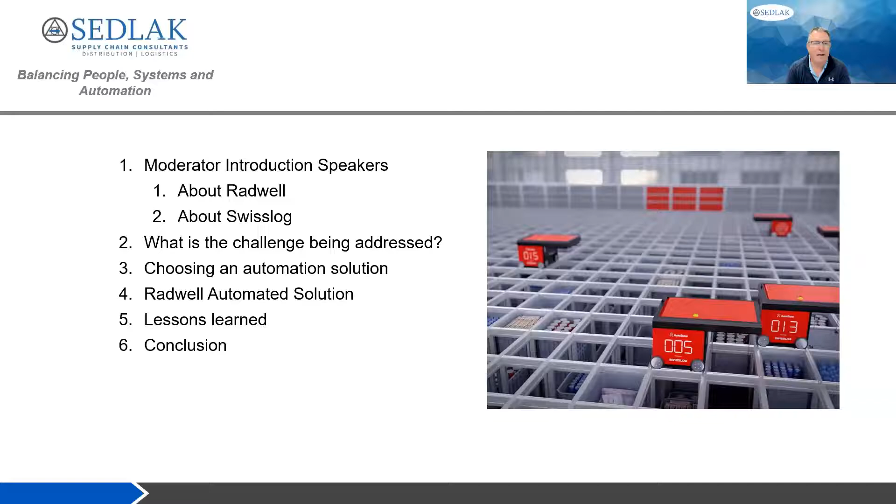Thanks, Lou. Appreciate that. So joining us today, we have two industry veterans that will share a little bit about themselves and a great case history. I know everybody's interested, as Lou mentioned, in goods to person in particular, so you won't be disappointed. So getting right to it, I want to introduce for our session first, from Swisslog, we have Paul Gottschlich, who's a sales director and a 40-year veteran of the industry. He's been instrumental in shaping supply chain automation strategies for trusted global players, and played a key role in the first ever AutoStore installation in North America. Joining Paul from Radwell will be Brian Janis, who's the global director of procurement at Radwell. He's responsible for purchasing, inventory, relationships, data, and catalog management for Radwell globally. Prior to his role, he handled facility design, project management, and automation systems implementation. Brian holds a bachelor's degree from Virginia Tech in mechanical engineering.

Paul, you want to kick things off for us? Will do. The first thing we'll do is have Radwell go through and explain who they are, and then we'll follow up with Swisslog explaining who Swisslog is. So I'll turn it over to Radwell. Brian, if you could go through and describe Radwell.

Thanks, Paul. Yeah, I'm Brian Janis, I'm the Global Procurement Director here at Radwell. Just to start off, who is Radwell? So Radwell, we are an automation, electronics, pneumatics, control, HVAC company focused around really MRO solutions for manufacturing facilities. If you think about how it's made and all the components and things that go into manufacturing, the parts, the pieces of automation, and really material handling systems, other systems, assembly lines, etc., we have the ability to fix those, repair those, or we have surplus components, or we're an authorized broker for new product.

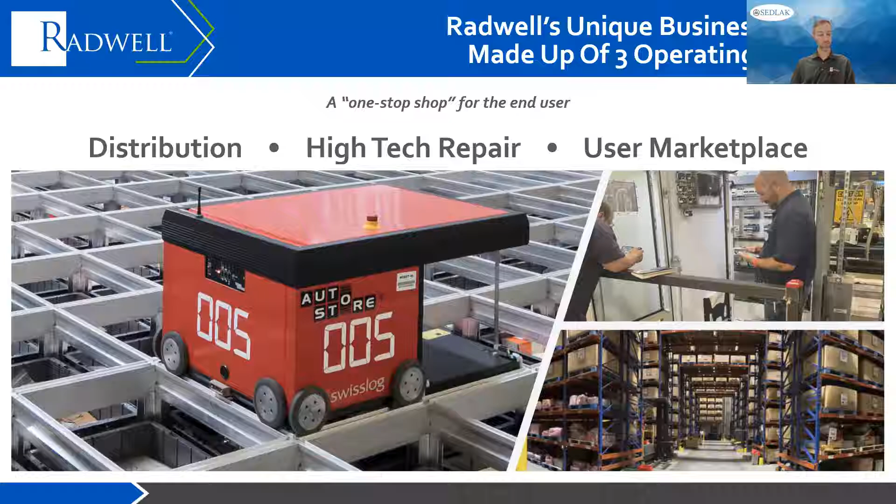Radwell services a whole bunch of different industries. As I described earlier, anything you can think of in terms of manufacturing, we're very much in those industries and in that area.

We have a very high emphasis on our customers, and what we do as a business is always customer driven. Because of that, we really want to focus on automation, and we wanted to use some of the automation that we fix and help our customers fix within our own facility. So because of all of that, we worked with Swisslog and explored some options, and we'd like to go through some of that and share our experiences.

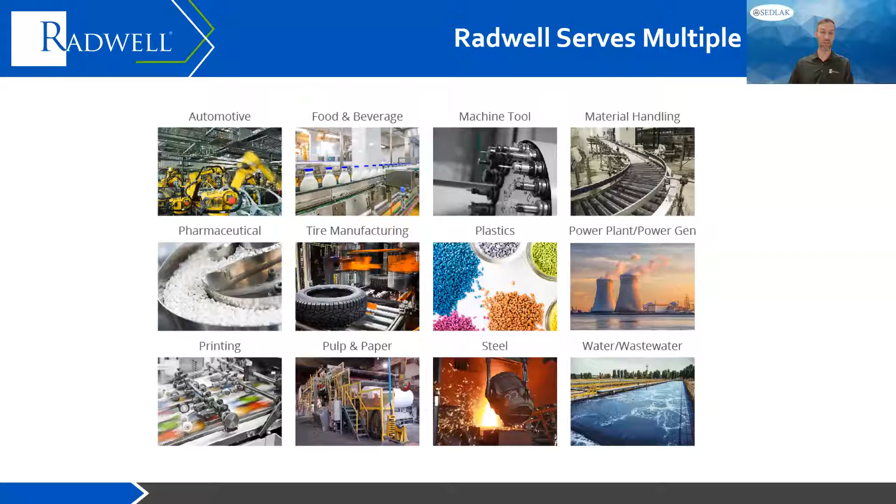And I'll turn it over to you, Paul.

Thanks, Brian. So as I said earlier, we'll get into a few slides that describe who Swisslog is, since I don't think everybody on the call knows who Swisslog is. I think everyone will agree we're living in a fast moving, continually changing and dynamic world, and that is why it's important to understand the main drivers in our businesses.

For the material handling industry, it has been trending up over many, many years. But over the past several years, more companies than ever before have found the need to automate, and in some cases, to survive. Therefore, at Swisslog, we believe the future in supply chain is robotics of varying types and needs to be data-driven.

As you look at Swisslog, we're located in 25 different countries. This allows us to support customers almost anywhere in the world. Our employees are located regionally, not centrally, to support our customers. This includes personnel in sales, implementation, control, software, and all areas associated with post-go-live support.

We have 10 different technologies that we use in our systems, along with third-party technologies. This allows us to develop the optimal solution for our customers. We have 6 product centers continuously improving our products and developing new products as required to meet market trends.

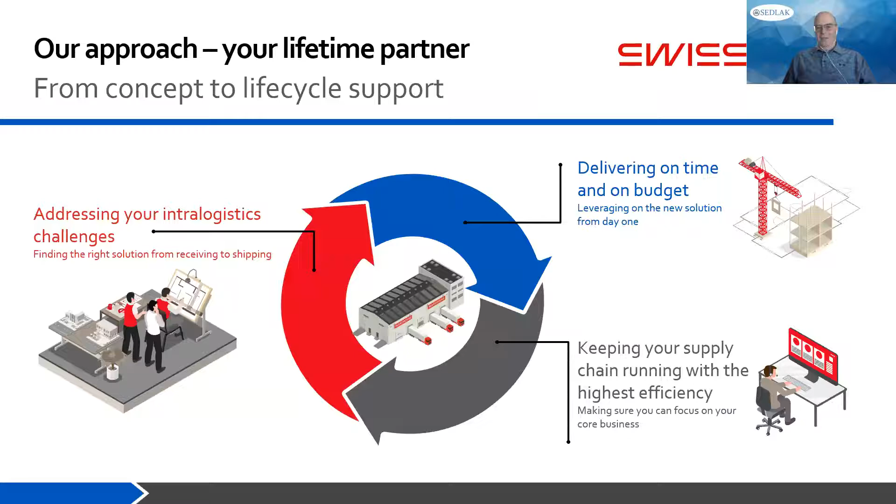To name a few features of our post-go-live support, we offer a global service organization that tailors maintenance and support programs for each customer to augment services they're not able to provide themselves. This can range from routine maintenance all the way up to full-time on-site support if required. We have 24/7 support via our help desk to ensure system throughput and uptime are maximized. We offer modernizations and expansions for any changes caused by changing business requirements, and we also have service technicians, local spare parts depots, IT managed services, plus other capabilities for post-go-live support.

For light goods technologies, which means handling either cases or totes, that would be the Cyclone Carrier, Tornado cranes, CarryPick, AutoStore, and QuickMove conveyors. Other robotic technologies we provide are ItemPiQ, to pick individual units from various entities, and ACPaQ, which is for mixed case palletizing.

To manage all these technologies and orchestrate the flow through our systems, we have a software package called SynQ, which contains extensive functionality and features that not only manage the different technologies, but can also manage operations for part of or the entire distribution center or warehouse.

SynQ provides synchronized intelligence that connects automation, robotics, people, and processes for all of our solutions. You can kind of figure it to be the conductor of an orchestra.

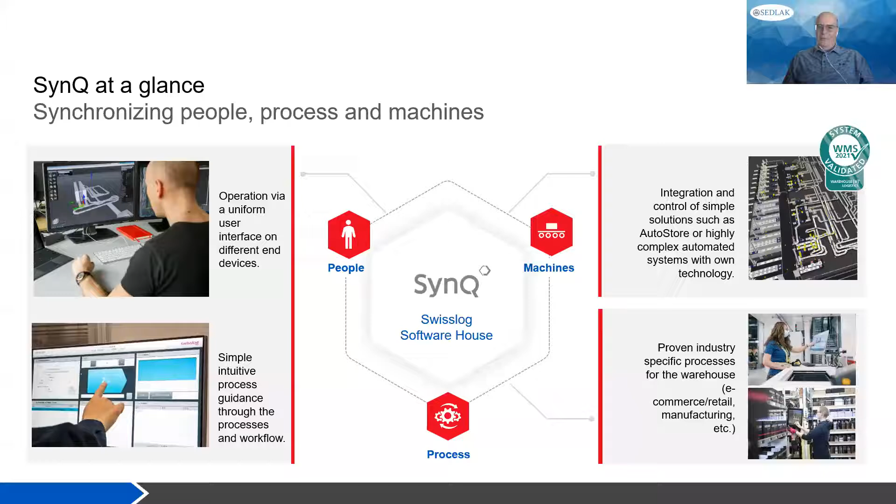SynQ is a modular platform with a single user interface that provides warehouse management, warehouse control, and material handling solutions for simple to highly complex automated systems. The platform is continuously developed by our SynQ Competency Center, with releases twice per year.

We have multiple technologies that compete in the same supply chain space, and we use the technology that is best for the particular application. The first technology deemed viable for Radwell was AutoStore.

AutoStore requires a special tote, called a bin, that is designed specifically for the technology. AutoStore stores and retrieves the bins stacked on top of each other with minimal space between the stacks, providing very high density of the bins.

AutoStore is best used when there is moderate to high inventory, and can be designed for low to high performance requirements.

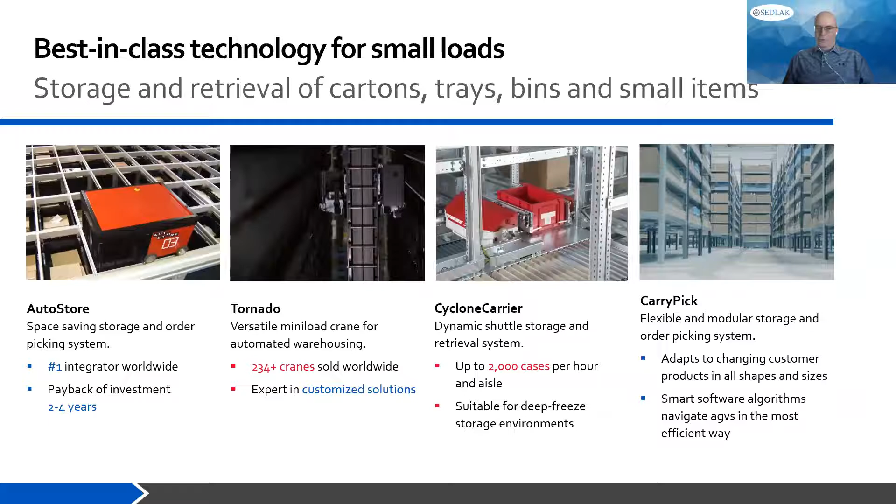The CycloneCarrier, which is a shuttle-based technology, was also viable, but is more ideal for low inventory and high performance. CarryPick was not available, even though it's shown here, at the time Radwell was considering the different technologies.

CarryPick is also a viable solution and is best used when products are larger, or the quantity of SKUs is low but with high performance, or clear space is limited in the building. It can also be used for a large quantity of SKUs or high performance.

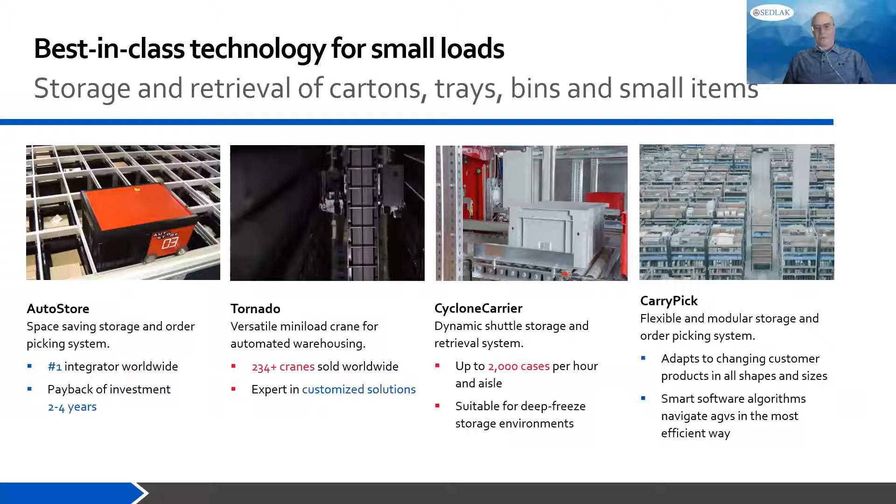Since we have multiple technologies to use, we work with the customer so they fully understand the pros and cons of each technology, so the best technology is selected for their solution, as was done for Radwell.

Now just to jump into the Radwell side and try to understand how we choose between all these options: our primary focus is a solution driven to better our customers' experience with Radwell. The nature of the surplus business is that we end up with a lot of inventory, a lot of items, a lot of things that don't move very fast but take up a lot of space.

The competitiveness of distribution requires us to be as timely as possible, while also ensuring that we have things on the shelf and can pick, pull, and ship those items quickly.

With the complexity of repair, we basically have another customer inside of our building that can be as demanding as manufacturing, or sometimes more demanding, in terms of having our warehouse deliver products to them. In a manufacturing environment, downtime is critical for a maintenance manager, who wants to avoid that as much as possible.

And when those downtimes do occur, our service needs to be spot on from Radwell's perspective.

We need to be quick, fast, and efficient with getting that inventory out to them, because they're in an emergency situation where something's stuck, something's not moving, they're not producing. Management is keen on ensuring that downtime is reduced at any cost. That's kind of our motivation behind our desire to do better for our customers, along with some common warehousing desires, which we have listed here.

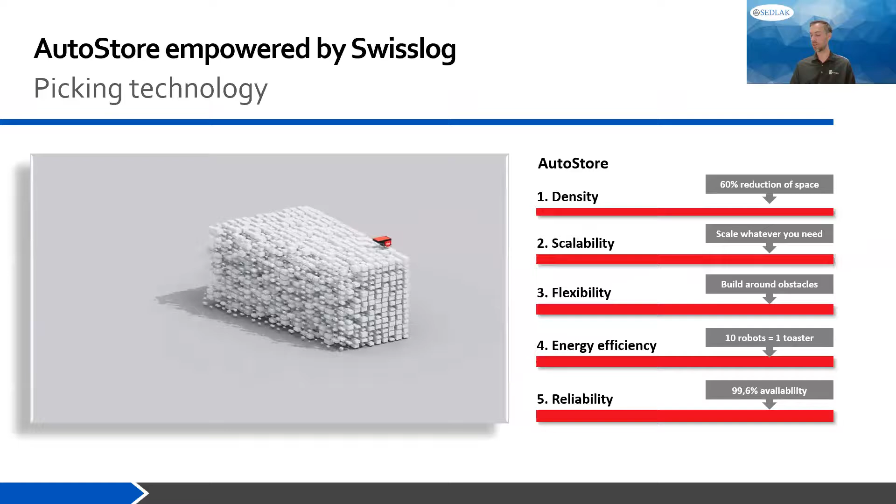And through this, we looked at obviously all the Tornado mini load, the Cyclone carrier, and others to try to understand it, and eventually ended up with the AutoStore.

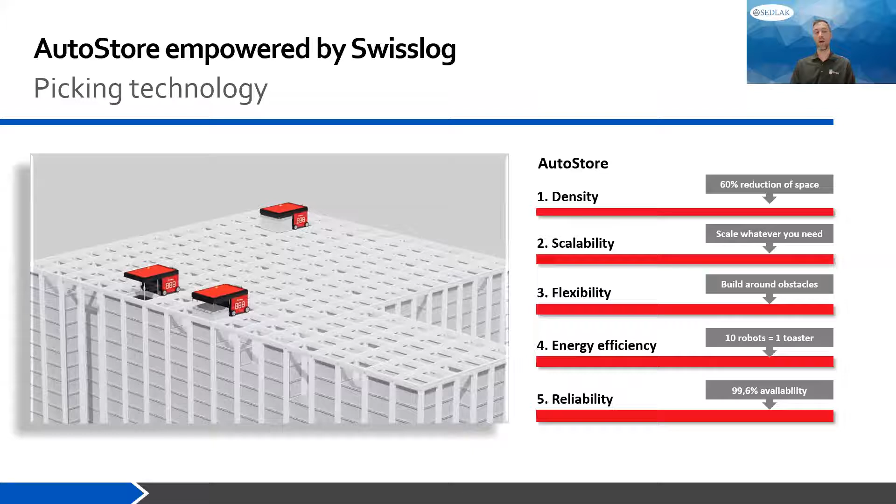And the reasons why were the density of this system. We were able to get the density that we wanted, and be able to store items in a space that most systems wouldn't have been able to store as much as we got.

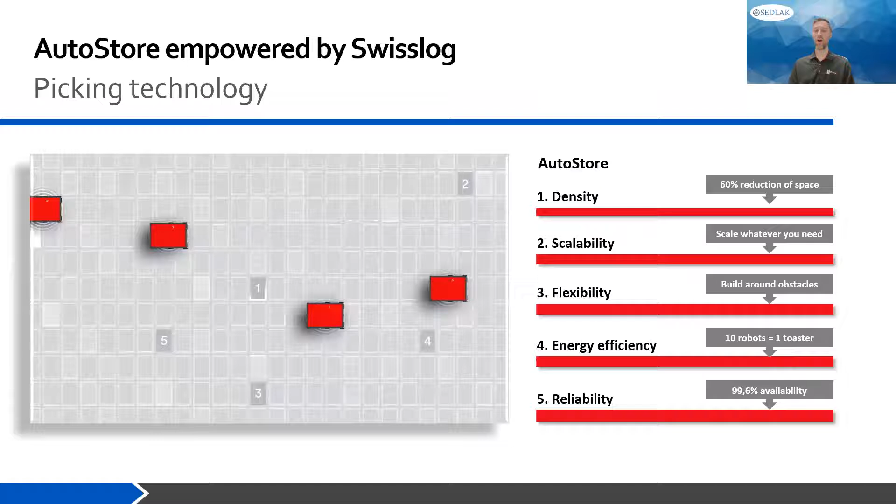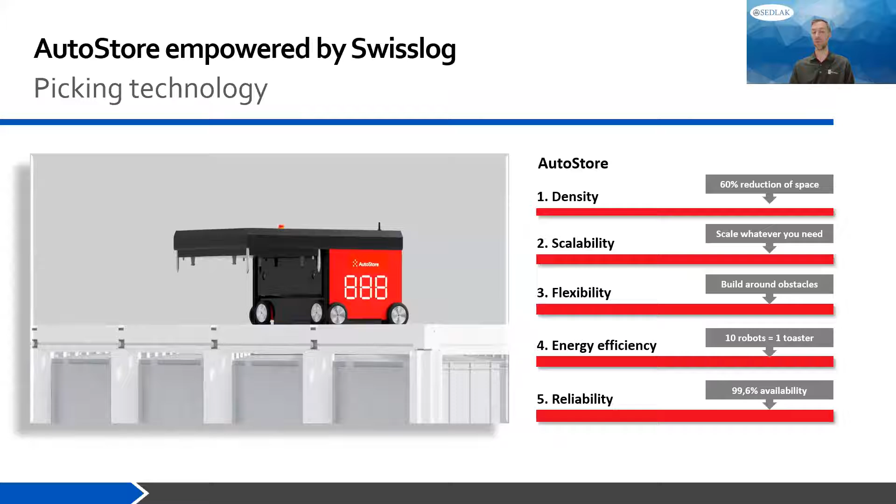With scalability, that's a huge one as well. Because we're constantly growing, we need to be able to expand the system, and even continue to grow workstations, grow the storage space, etc. Flexibility for this, we'll see here in a couple slides why flexibility is important. I won't get too much into that one.

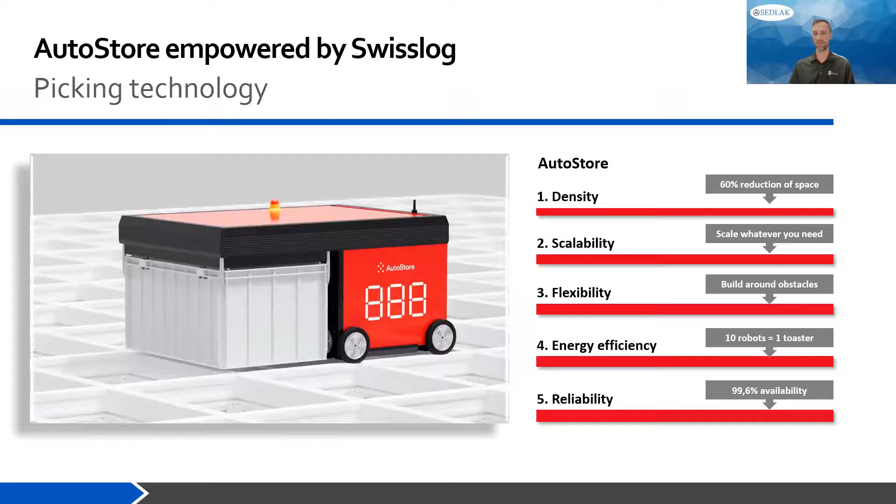Energy efficiency, obviously, is we try to be as green as possible too. In AutoStore, the robots are kind of like small vacuum cleaners. They don't use much power. And then reliability. For us, we have seen basically 99% plus uptime of the system.

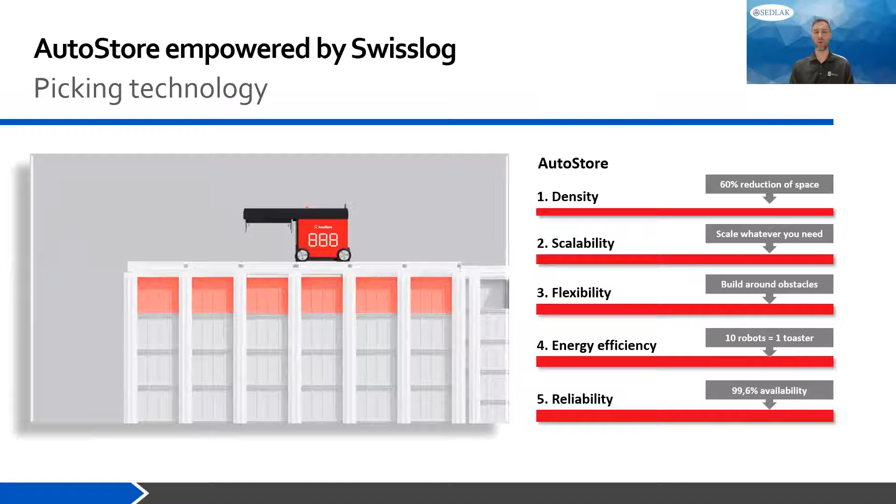And even when we do have an occurrence where a robot goes down for normal operating business reasons, the system's back up and running within minutes. We can take that robot off.

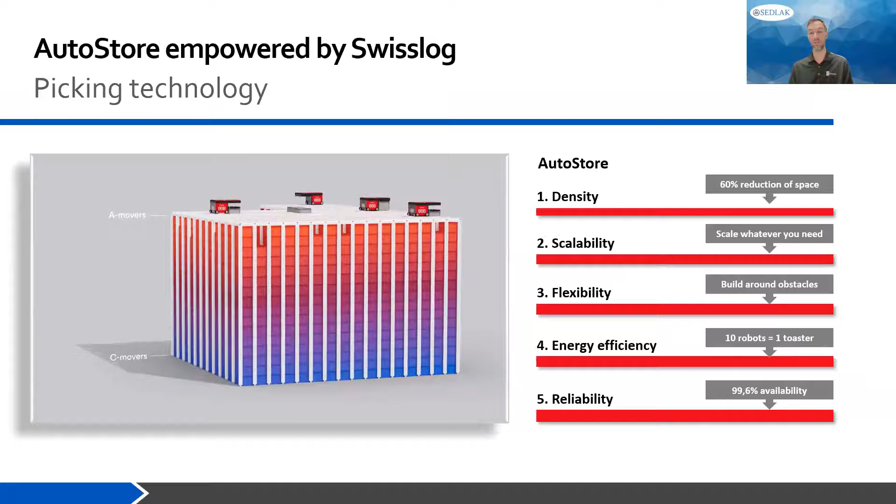We can basically put it into a service area of the grid and let the rest of the system continue running and handle it quickly. Being that we are in automation, it's easy for us to look at these robots and put them back onto the grid. But we've been able to take regular warehouse representatives and train them on the system to help keep it up and running for us. So for us, the AutoStore system has provided a large amount of reliability.

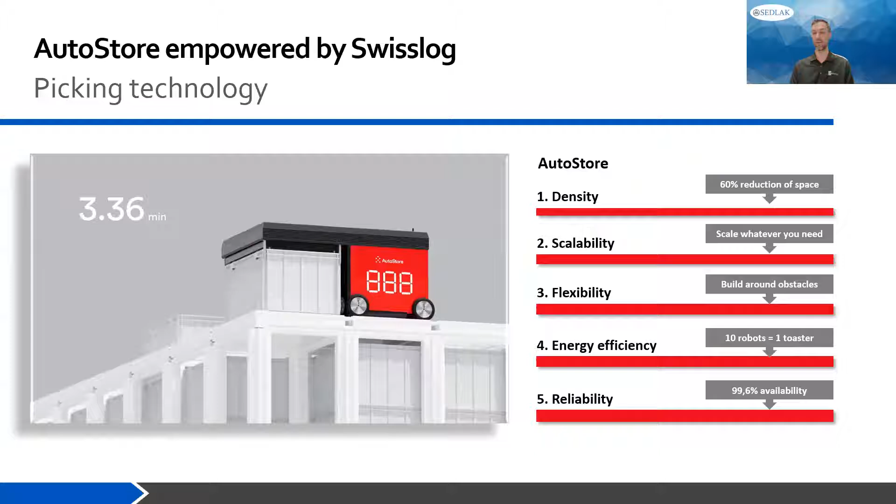With this video, you'll get a more in-depth and in-motion view of what the system looks like.

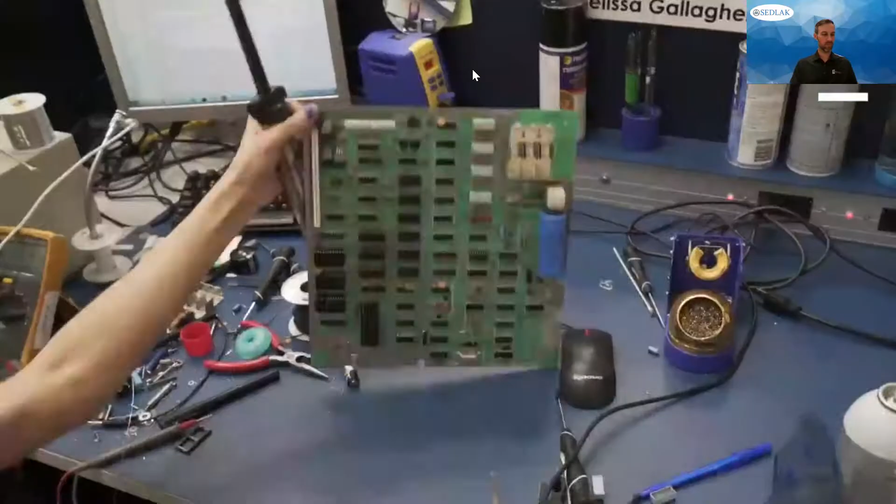Radwell International is a company that focuses on the sustainability of industrial manufacturing equipment. We offer repair services on electronics and electromechanical products. The majority of our inventory is at this location, so we support all 9 of our locations with inventory from here.

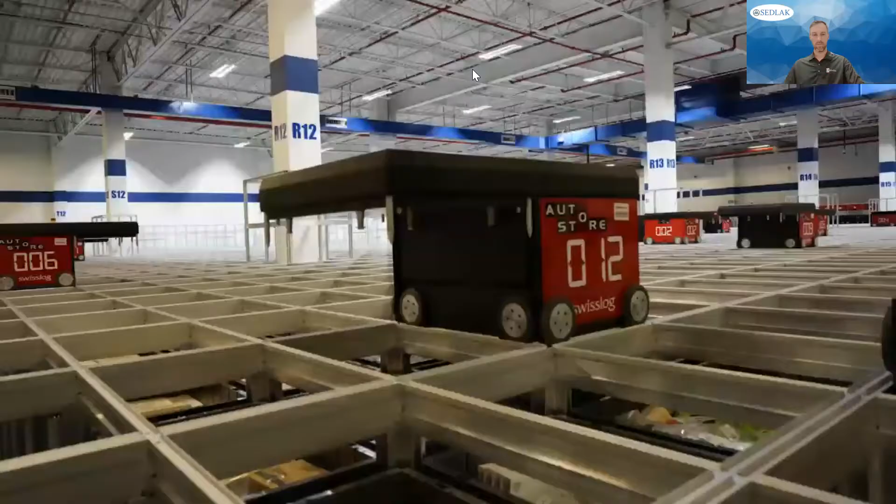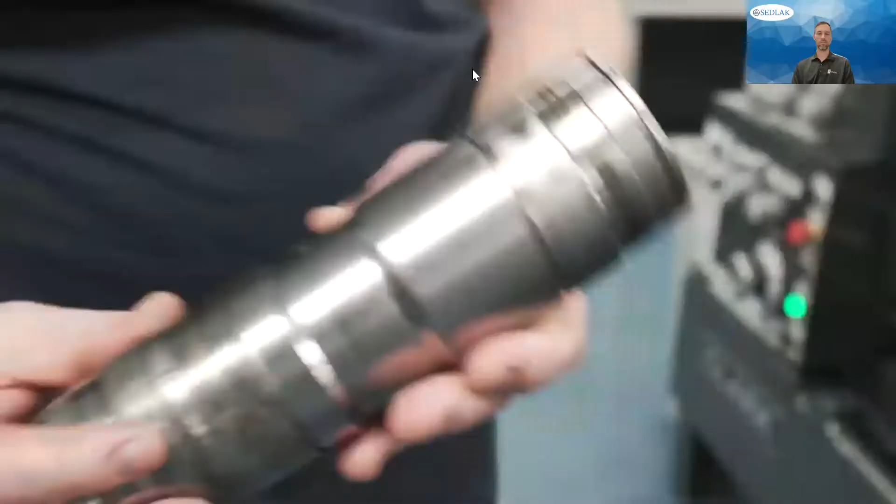Radwell International is a very family-focused business. We consider all of our employees to be members of our extended family. We demand high productivity from everybody who works for us, but we try to make it as fun as possible. Extremely proud to work for a company where we take so much pride in the history of the company, where it was founded, who it was founded by, and how it's progressed over the years into what it is.

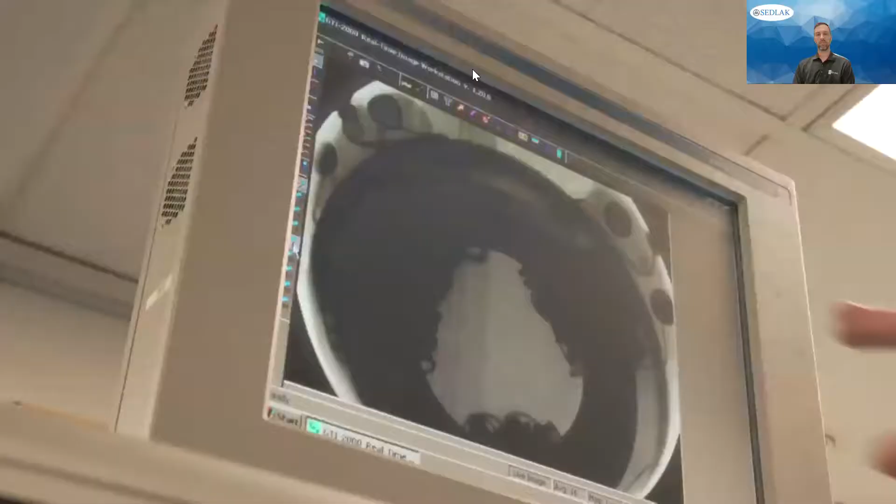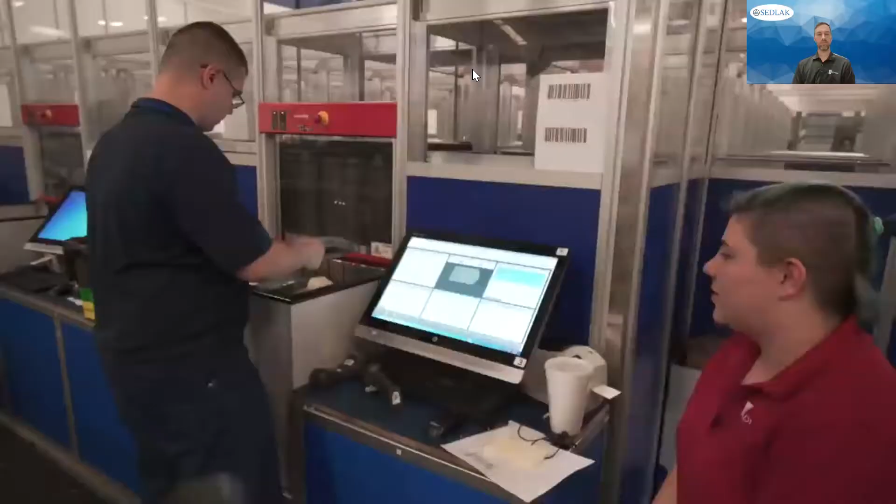We are a very high-tech company, so a great majority of our employees are technicians and engineers. We're constantly striving for new and better ways to do everything so we can become faster and bigger. From our perspective, it's how fast we can pick it, how fast we can get it to the boxers. Opportunities come up all the time. The product just keeps flowing in, truckload after truckload every day.

Our current inventory is about 12 million SKUs. Our database contains about 24 million SKUs. That's a business model that leads to never having enough space.

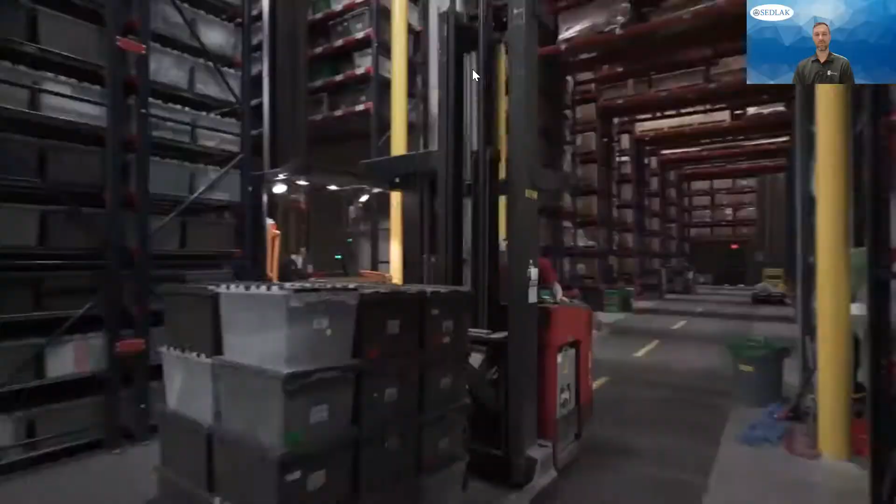We wanted to put in an automated system for the inventory and wanted to find out what would be best for us. When we were looking at systems that would allow us to utilize the most storage per space, the AutoStore for this particular building lended itself quite well. The other alternatives for storage really just couldn't store as much. We got about 30% more storage in the same square footage compared to the other solutions.

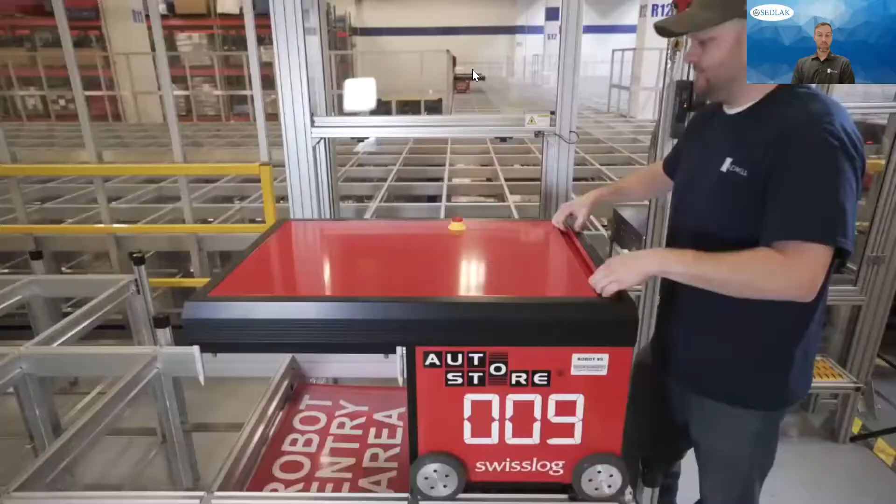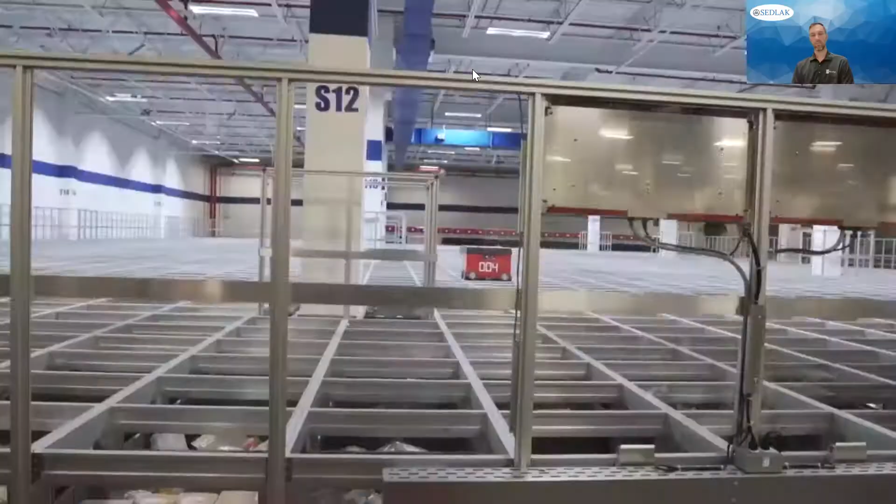The system utilizes 34 robots in our particular case, and the robots are all independently controlled units. If one goes down, we're not down. So there are advantages in the AutoStore in terms of what has to be maintained. You can easily increase the size of the aluminum grid without actually having to turn the system off. So you could be building more infrastructure, and when it's complete, fill it with more inventory without losing really any time in terms of productivity.

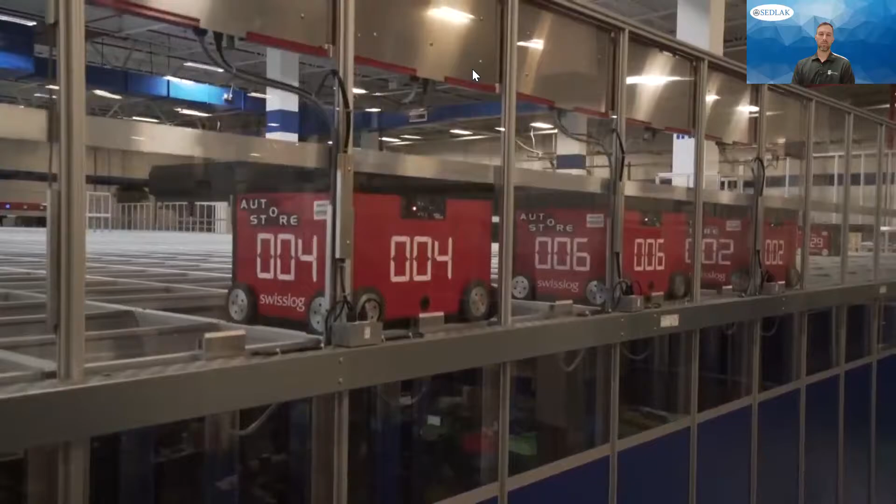What we do at Radwell International isn't easy for somebody to learn. You can't just jump in and instantly know everything and understand the processes and details we need in order to function at a very high level. Swisslog and their personnel were able to jump right in and understand at a very high level what our needs were, and then provide an automated system and software to go with it in order to perform at the levels we anticipated and expected from the very beginning.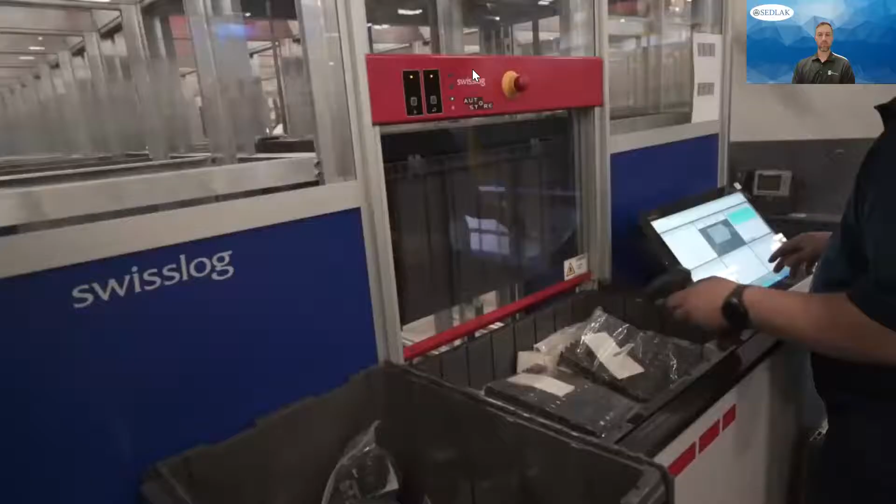It's been amazing to be able to work with a system from the vice president all the way down to our site manager, the technicians, the engineers, the support personnel. Everything has been a pleasure to work with everybody.

Traditionally, we've been able to do about 120 bin visits in an 8-hour period on average in our warehouse. The Swisslog AutoStore system is capable of doing 120 bin visits per station per hour.

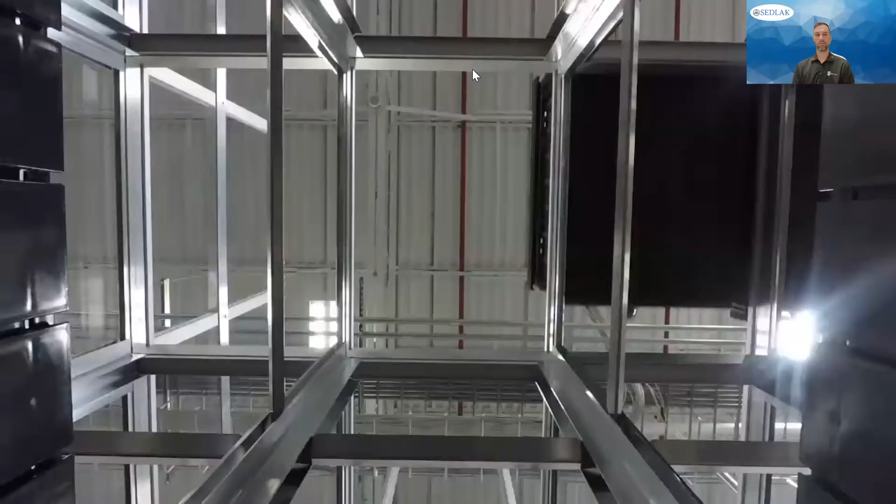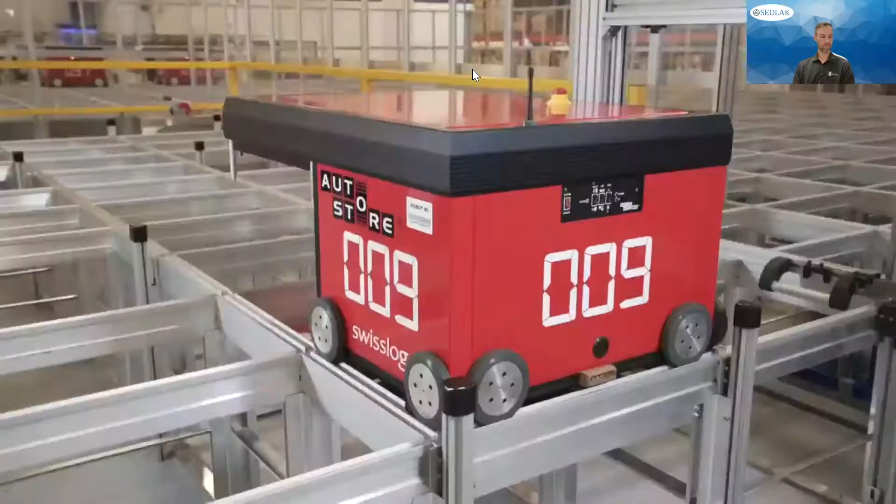Everybody is very impressed by it. It's the highlight of every tour we ever do, and it leaves a fantastic impression on the customers when they leave. They're more likely to want to do business with Radwell, seeing that Radwell is willing to invest in the future in this kind of way, shows that we're willing to invest in whatever's needed to support them.

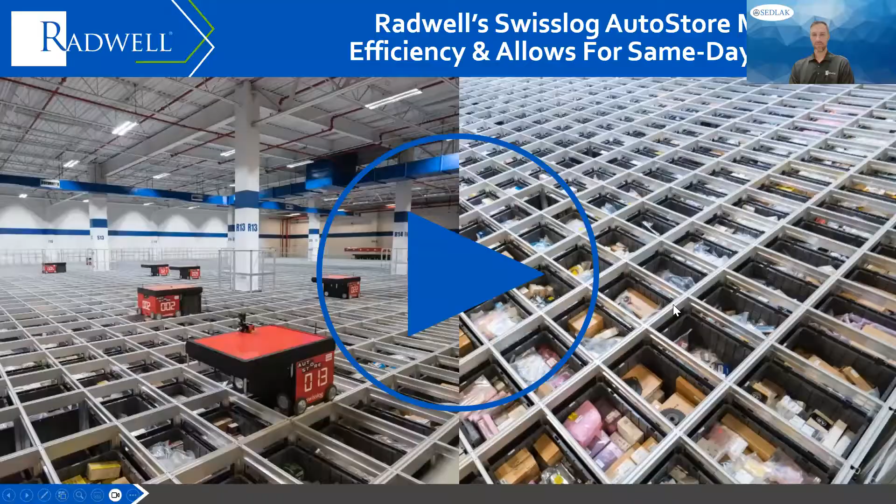Yeah, and so that's our AutoStore Willingboro facility, and the objectives that we set out to hit, some of the challenges that I expressed earlier, they were all more or less achieved through that system, and we improved our inventory management. In that video, a couple years old now in terms of that, but we had 12 million SKUs at that point in time.

Now we have 40 million, and AutoStore is still running great. We've shortened our fulfillment times. We were able to achieve that maximum storage capacity based off of other competing technologies, and we were able to increase our pick performance by close to 800%.

And those numbers are still accurate today. We're still picking upwards of 100, 120 picks per hour per station, whereas previously one person doing zone picking in our facility was able to do 120 picks in a single day.

The 120 picks from the AutoStore perspective in an hour is actually slow, I will note that, but that's primarily due to how we store items, not due to the capacity of the system. Technically, our system could pick faster if our humans were able to actually find the items quicker in the bins. And that's just a business decision that we had to make on our side.

But the results speak for itself. We were able to put this in place actually prior to our ERP migration of this system. And throughout the ERP migration, this system actually made it easier for us to transition because we made that connection early, and we're able to put products in prior to fully migrating over.

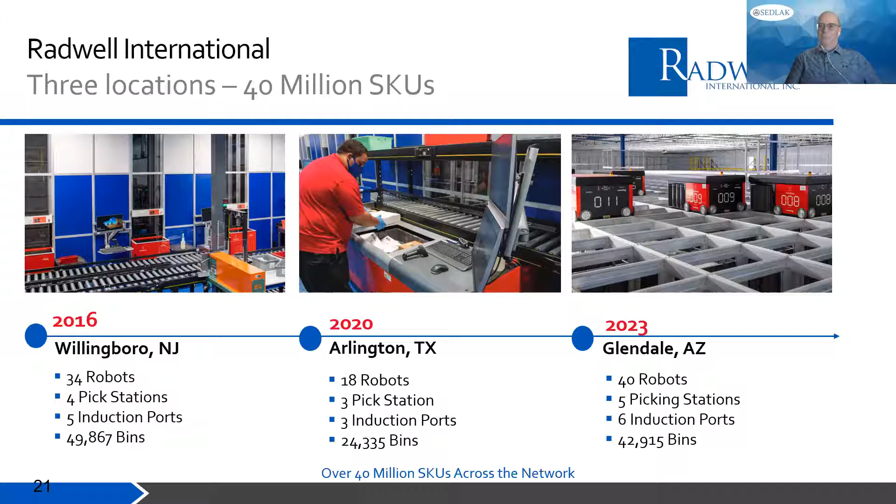It was actually tested to accommodate 8 million SKUs. So if Radwell decides to put 8 million SKUs in there, we're guaranteed that it can handle it. If they want to do maybe 40 million, they may have to do some more testing on that, but I'm confident that it could handle it.

Yeah, and with those 3 sites now that we'll have with our AutoStore, we've really seen since we've ramped out, or since we've gone live with each system, we've really seen an impact to the overall business as well. The automated picks per hour in our Texas facility is over 250 at this point, and that's our second AutoStore site. And our New Jersey site is upwards in the 500, 600 range.

We have 52 robots and more coming. We have great control over our inventory and what's happening with it, and we're really able to scale and grow and service the needs of our customers.

With this system, we've been able to offer basically same-day shipping on anything within that system. And most of the time, even though we have a cutoff, we can get stuff out even that same day without going past that cutoff time period because of the system.

It's really the other areas of the business and the other warehousing that we have inside for larger items where we don't hit it. But the AutoStore continually outperforms and really has exceeded our expectations, even from an ROI standpoint initially. So we've been just really thrilled by the solution and glad that we worked through this and looked at everything that we did look at in order to come to this conclusion.